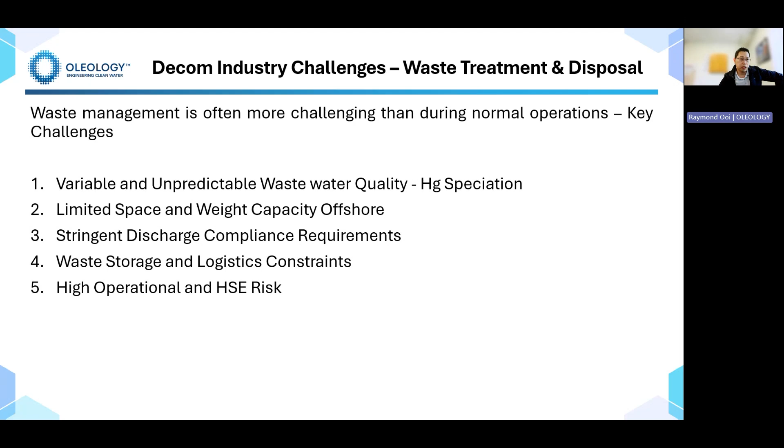So knowing these challenges, what is important for us to focus on in decommissioning, like I mentioned earlier, is mercury inventory and distribution. We commonly struggle to understand the distribution. If you can't understand the distribution between colloidal, ionic, elemental, and particulate, we're not going to have a good ground to start off the design. In other words, you are not able to quantify the mercury speciation. You know there's mercury in the fluid, but you are unsure how it partitions.

And as we know, mercury likes to accumulate in vessels and low points. You see a lot of this when you open up the vessel for vessel maintenance during turnaround. Potential discovery of mercury, especially late in life, with changes of reservoir conditions and water cut, normally it's going to be too late for the facility to adapt to that change.

In the areas of wastewater treatment itself, there are also limits to conventional technologies in terms of produced water, wash water, and tank cleaning. In other words, you have a facility that has been operating over the last 25 to 30 years. The operating envelope has already been determined. The design has already been somewhat cast in stone. How are you going to react to changes in these conditions when you start to decom the facility itself?

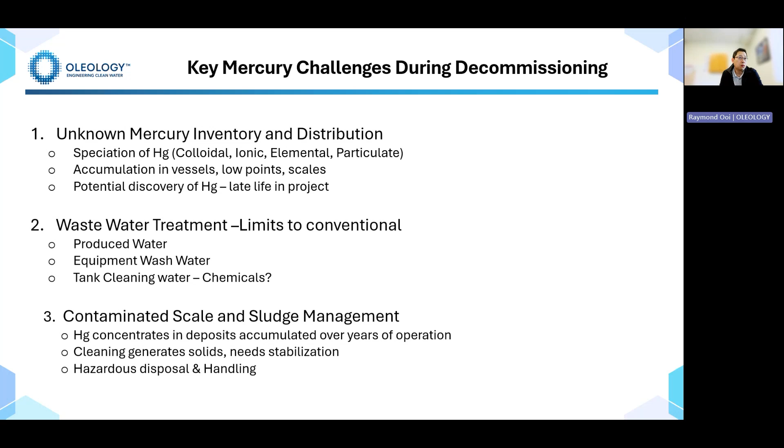Number one, start early. Screening and mapping of the mercury is critical. Understanding how mercury partitions itself, the quantity, what amount is elemental mercury, colloidal, ionic. It's important to have that mapped out early in the planning stage before you react to a waste that is actually seen during the decommissioning activity itself.

The second bit would be on segregation. You would try to segregate your contaminated waste, or waste that you think would have a higher quantity of, say, mercury compared to the other waste streams of just oil and water, for instance, if it's a liquid waste. That is the principle of segregation: not to mix everything into one cocktail mixture and then have to treat all of them together in a single unit.

Targeted treatment is also something that we looked at, in terms of whether you go site-wide with one single system that fits all, or you concentrate only on areas that are high risk. The areas that are lower risk, you treat on site. High risk is disposed, for instance, depending on the risk appetite.

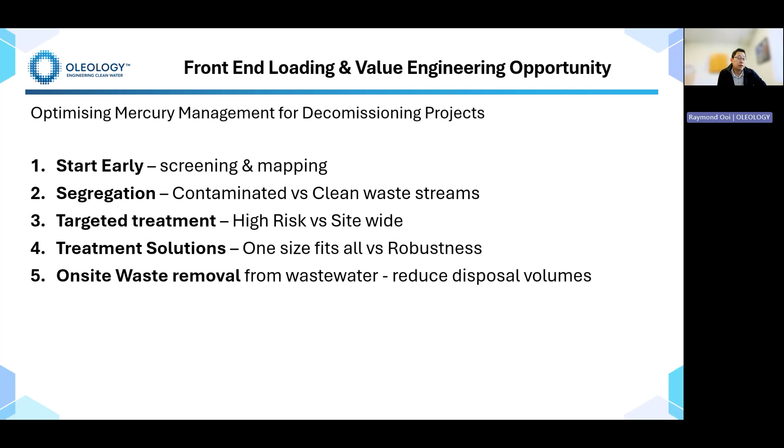Okay, so it's just a slide about having that front-end loading mentality early in the project, in the planning phase, before you start execution. So what does Oleology bring into this picture here?

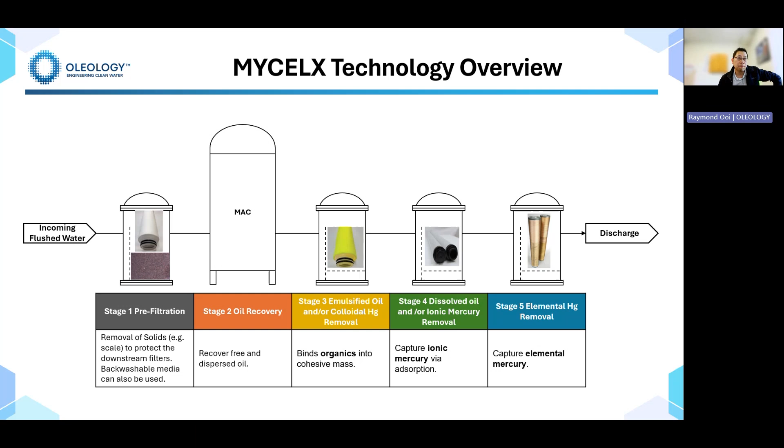So this is the same diagram I've just explained earlier. Now you see them on a larger scale in a photograph, with these 1, 2, 3, 4, 5 stages. For the first 2 stages on the colloidal mercury, there can be a different range or variety of filters that we may use, depending on whether the fluid also appears to have emulsion, especially oil, or other dissolved organics like BTEX, phenols, and so on.

So again, what we're trying to say is that because you have filters that are interchangeable and the filter housings are basically standardized in that form, you are able to cater for fluctuations or provide robust solutions in the event of uncertainties offshore. So what is MyCelx? What is in the filters themselves?

Basically, every filter here is infused with a polymer-based chemical which is hydrophobic, in this case they repel water, and oleophilic, they attract oil. So what you have is basically a simple system, nothing complicated, no moving mechanisms, no pumps and whatnot. The technology is basically infused in these filter cartridges.

And it's also important to note that when hydrocarbons bond to this oleophilic chemical on the surface, they are irreversible. So it cannot leach out from these cartridges once it's bonded, including the mercury in this case. Okay.

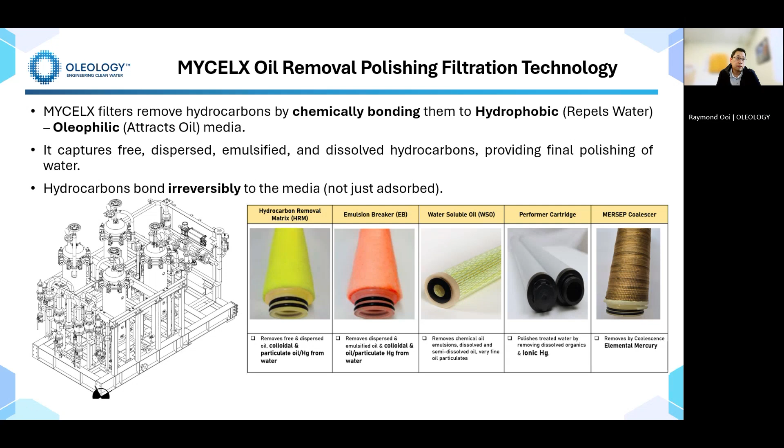So next, I'm going to talk about mercury speciation. Because we understand the nature of each of the filter elements and the difference between each filter element, we are able to conduct a speciation trial or demonstration of the mercury. So how do we do that? Normally we line up these three filter elements, starting with the colloidal mercury removal element, the ionic mercury removal element, and also the elemental mercury coalescer.

So you line them up together in series, and we pass water with known mercury content at the inlet through the system. At the outlet of each element, we take a sample and we send it to the lab.

Measuring the speciation of mercury is always a challenge in the labs, because as far as we know, going to the labs here in WA and Australia, we are quite limited in the ability to differentiate the different species. So what they typically do is measure total mercury.

So because we know the nature and operating principle of each of these elements, we go with the principle of elimination. In other words, when you pass raw water from the decom activity that has known mercury content, any mercury removed after the first element is identified as organic mercury. Likewise, for the second stage, we know the performer media adsorbs ionic mercury, and so on. And then the third stage being elemental, right?

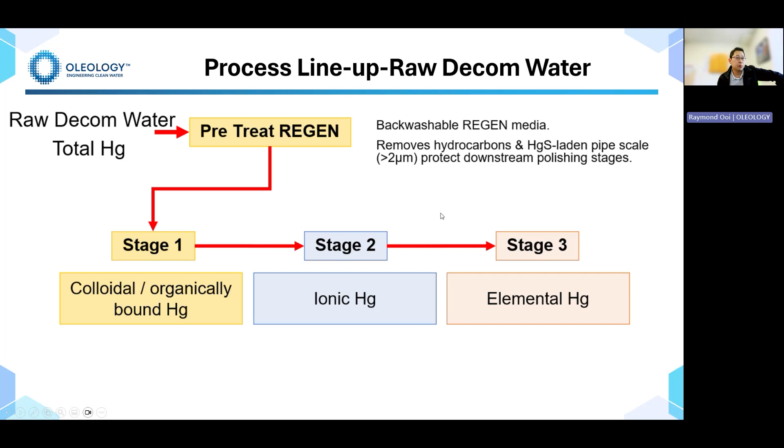So a typical process lineup for raw decom water: water collected from flushing and cleaning will first be passed through the pre-treatment stage, as I mentioned earlier. It could be media, or the sacrificial solid filter, to first remove the solids. If it's oily, it will be passed through the MAC coalescer to pick up the oil. From there, it passes through the three-stage process from the previous slide to remove the different mercury species.

Next, this is a looping video just to explain. So what is this coalescer all about? The elemental mercury is removed in the third stage, as shown earlier. This is a coalescer, not a filter. It looks like a filter element, but it actually works as a coalescer element. So what happens behind the scenes? How does this system work? It works on the principle of amalgamation.

So what you see on these elements here is actually gold-plated. It's a fusion of different metals that are braided together. And as we know, gold and mercury like one another, right? So when gold contacts mercury or vice versa, amalgamation will form.

So amalgamation forms. This diagram on the right-hand side shows you that whether it's gas or liquid, elemental mercury coming into contact with the braid forms amalgam. And over a period of time, the amalgam will start to coalesce. Think of it as smaller droplets of elemental mercury: when they come into contact with the braid, they start to grow. From the amalgamation, they will now start to coalesce. Subsequently, from coalescing, the droplet gets bigger. Now it starts to wick to the bottom.

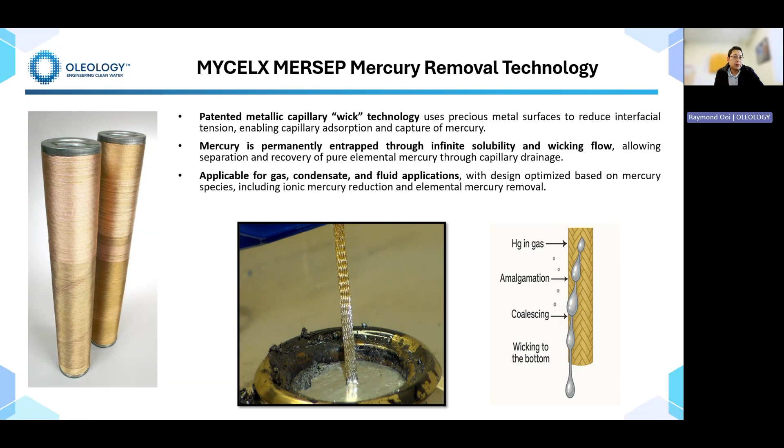Okay, so because this is a coalescer element, it doesn't get saturated, and whatever mercury has been dislodged or collected onto the braid is collected. So think of it inverted the other way around, against gravity. What you have now is elemental mercury dripping and collected at the bottom of the vessel or the filter. So these are just some of the deployment examples of how the technology has been deployed.

Taking, for instance, a build that we have done in the past. This big vessel, as I mentioned, is the MAC, the oil coalescer. These filter housings are fitted with the cartridges shown in the previous slides. We will mix and match cartridges depending on the level of contaminants that we see in the water. But based on what you saw earlier, the 3 or 4 different cartridges will be lined up in each of these individual housings.

One housing can have 10, 20, 30 cartridges, depending on the flow rate. It's scalable. Okay? So when they are used in combination, we are able to systematically remove contaminants stage by stage. That's the whole idea of it.

Okay, and these are also some examples where we have previously deployed decommissioning solutions. The first one: remember that filter that was yellow in color earlier, which we call HRM, hydrocarbon removal matrix, which has a polymer infused on it that is oleophilic and hydrophobic. If you infuse that into a cloth-like material, this example is used for pipeline cutting. In this case, the client wanted to cut the pipes subsea.

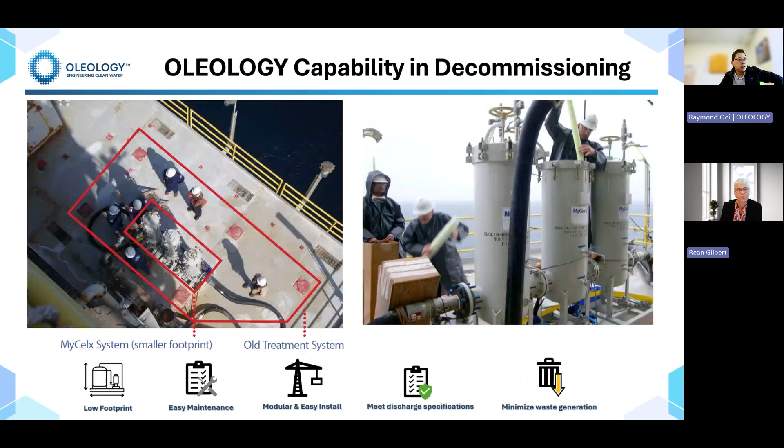I had a question. I was wondering, and you may have covered this at the beginning of your presentation, how mobile is the technology, and could the treatment be undertaken at a port or a decommissioning yard, or does it need to be transported to your specialized plant? Okay, maybe I'll just go back to some of these slides earlier. So I guess this question can be answered mainly from this slide.

So as I mentioned, this is just an example of a 3x2. In other words, it's duty standby, three stages of filtration. So think of it as having the first stage to remove colloidal, second stage ionic, and then the third stage being elemental.

This skid itself, each of these has 20 filters, 20 elements inside. It does a filtration rate of around 50 cubes per hour in terms of treatment capacity, and it can be loaded into a 20-foot container. So the size for this one is around 2.5 by slightly less than 4 meters in length.

So what happens, Raymond, if the initial estimate for mercury is wrong? Do you then need to get a bigger unit, or what happens? Yeah, so two ways of looking at it when we talk about estimates being wrong. Compared to a typical absorbent technology or absorbent solution, the quantity of media or bed volume is obviously corresponding to the levels of contaminant.

But from our end, it depends on which species. If you're referring to the ionic and colloidal, because these are filters, as I mentioned earlier, and they work on the principle of absorption, yes, they will require more frequent change, because once the active sites are used up on the absorption surface, this filter is considered spent, saturated, so it has to be replaced. So it's a more frequent replacement of the media.

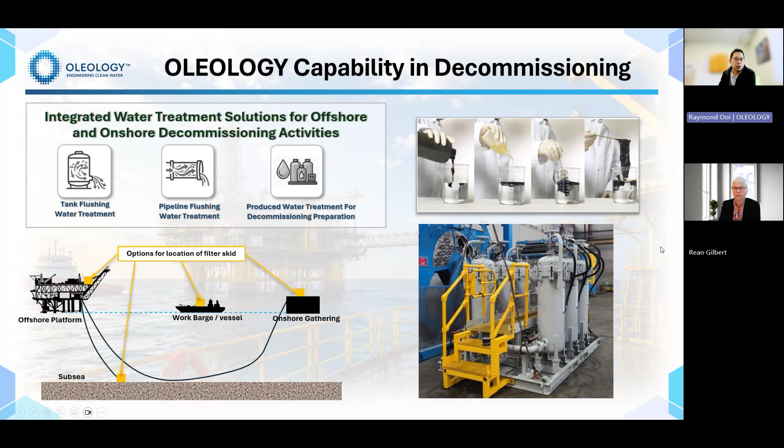Are there any examples that you can share to give us an indication of what mercury levels were before and after the filtration process is carried out? The use case that we had was mainly for gas service. In fact, this example here is more of a gas plant rather than a liquid system, which we are currently doing some tests on as well, to understand the full operating envelope of what it can do.

But from the gas side, we had around 99.99% removal. I can't really remember the numbers off my head, but I think it had coming in at around 100 nanograms per cubic meter, if I'm not mistaken. But it was a good outcome. It was a retrofit in this example. The elements were fitted into an existing filter coalescer.

We took off the existing elements that they had prior. Like you said, when you plan for design itself, it was never intended to have mercury coming into the plant itself, into the system itself. And what we did was we continued with the existing filter coalescer, but we just replaced the elements internally with this coalescer itself. So we are able to then remove the mercury before it goes to export.

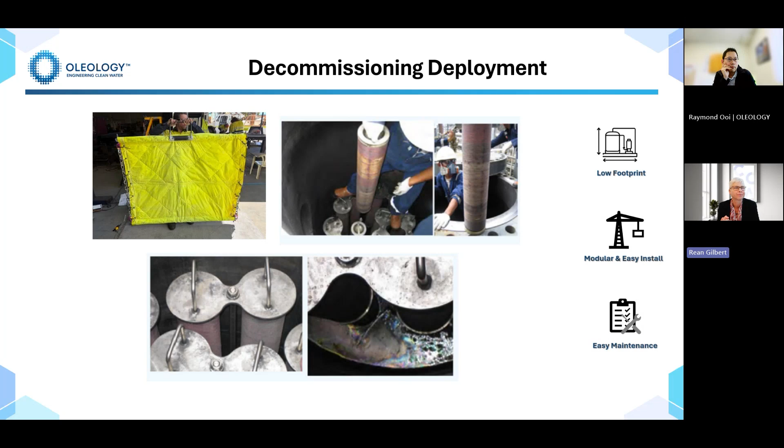Very good, very good. I have a three-part question, but I'll break it down into two smaller bits. Regarding the filtration skid process, what happens to the mercury saturated filtration elements, cartridges? Yep. So the two stages that we mentioned earlier, these two, they will be saturated and then they will be disposed as a solid waste, as how spent filters are. Of course, with known mercury content in there, it will be handled as a scheduled waste itself.

Does Oleology plan and manage the disposal of these items and waste generated from the filtration process? Not at the moment at this stage itself, because solely based on the volume and depend on the needs basis for the clients. But typically, we would supply these elements itself, and the disposal is managed by the client or the end user. Yeah.

So technical question here is somebody would like to know about the flow rate and the capacity of the individual filter bodies and the pressure vessel unit. Okay, so go back to this. So for this particular unit here, it's operating around 10 to 20 cubes per hour itself, just so that you have a feel of the size and the footprint itself. Design pressure is 150-pound rating itself, designed for 10 bar.

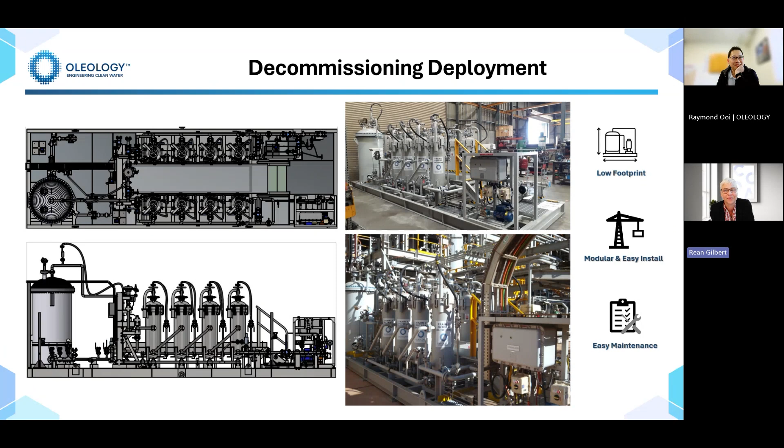Organic mercury, mercury vapor, liquid mercury, lots of mercuries. Yeah, so I think the first three principles that we spoke about here is how can they be measured? We will use this method, as I highlighted earlier. It's a principle of elimination. So once you stage the sequence out in this way, through the principle of elimination, we are able to identify the breakdown.

Right. Good. So the first one, like I mentioned, you will have organic base removal, because it's a hydrocarbon removal filter. We know organic mercury has the tendency to bind to hydrocarbons. So through that principle, if you pass water with mercury through it, anything that comes off from each stage, say 100% goes through. First stage, probably you get 80% removed. Second stage, 15%. Third stage, 5%.

So it's through that principle of elimination that now you categorically say that you got 5% elemental, 15% ionic, and 80% colloidal. So this is something that we can do in-house here in the lab, or it's just a small skid that is deployed to site, and it can be done at site as well, as that first stage of trying to understand the speciation of mercury.

Yeah, good. So here's a curly one. It may not be your area, but I'm going to throw it out there anyway. If it's not answered today, it might be a question that we tackle in the CODA Hazardous Materials Special Interest Group. But it's a subsea pipeline. Can you recommend methods of how a uniform cleanliness for the length of the pipeline can be verified, other than sampling the waste fluids? This is a topic of interest frequently requested by the regulator, especially for any leave in situ end states. Good.